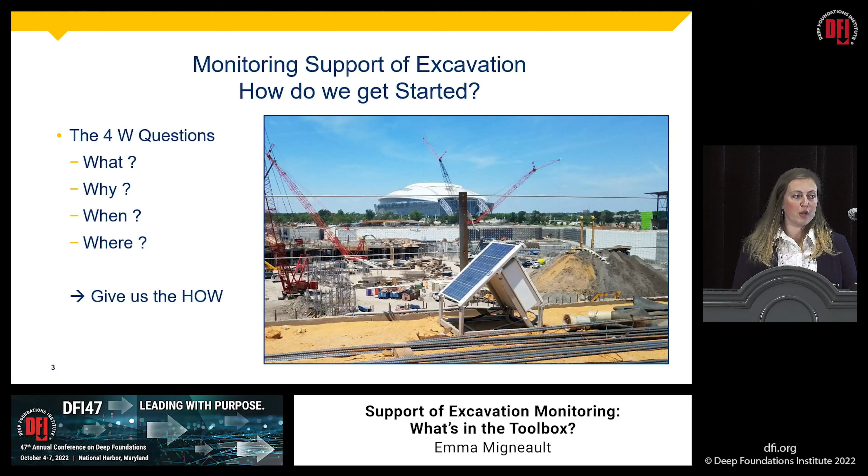So starting out with what are we monitoring? So in this instance, we're talking about support of excavation. So we might be talking about sheeting. We might be talking about soil nails. And not to forget adjacent infrastructure. A lot of this work is done in urban environments where we have to be concerned with adjacent buildings, adjacent utilities, maybe bridges, and also rail. Where I am in the Boston area for a lot of our projects, rail is a big component of the monitoring that we end up doing associated with support of excavation monitoring.

So the reasons that we monitor, sometimes we get the call and it's like, well, I have to, so can you come do this? But otherwise, sometimes it's about mitigating risk. Sometimes it's about design validation and construction control. But whatever the reason, we got to understand the project to come up with a good solution that can provide all the data values that are needed to understand what's happening on site and make objective decisions.

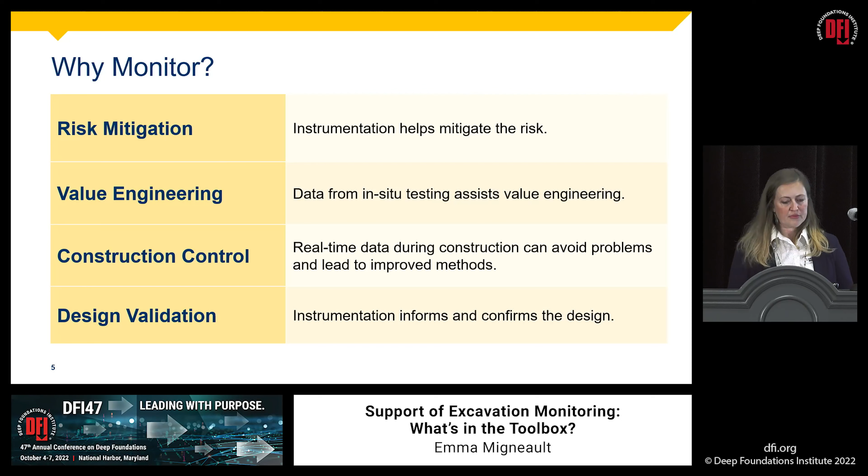So when are we monitoring? Not really just to block off on the calendar what we have to do and when we have to do it, but really to understand primarily the frequency of monitoring over a baseline period and then through the project. Frequency of monitoring can really dictate what kind of systems are able to perform in that situation and give the data that we need. So are we looking at once a week? Are we looking at a couple times a day? Or are we looking at every few minutes? It's a big factor in when we pick the systems that can make that data happen at that frequency.

It's also good to think about the duration of monitoring. If we're going through various conditions and we need to just be aware of them, whether that's increasing the maintenance schedule over winter months, especially in New England, that's pretty important. Or if it's just understanding how it might factor into solar power for the systems. Understanding the duration of the project can be pretty important to what systems we design and how those systems function on site.

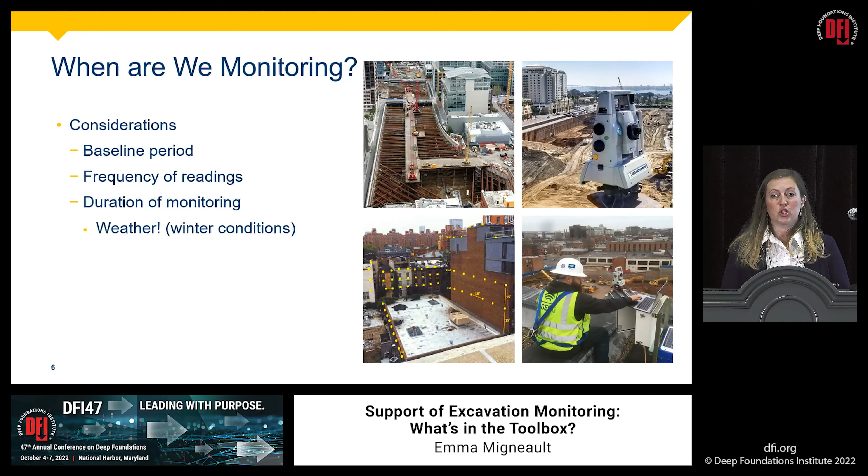So where are we monitoring? So we're monitoring the support of excavation, but are we monitoring just at the top, or do we have to come back and install more along with the progression of work? What is the access like for those locations, and how does that determine, in terms of initial installation or system maintenance through the project life? Definitely important things to consider.

We also want to think about the number of monitoring points. What spacing do we need them at, both for the support of excavation or for adjacent infrastructure, and what's going to be able to give us the best picture of what's happening on site.

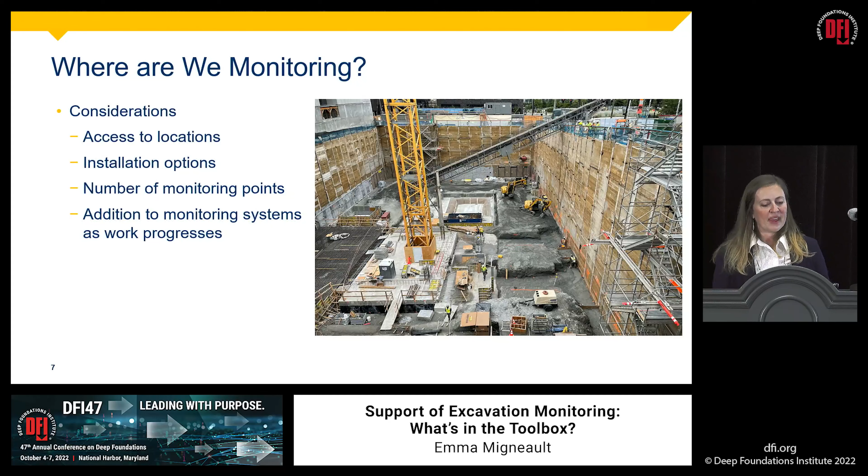So this kind of brings us to how. Having that conversation, understanding the parameters that you're looking at gives us the how, what systems we can pull from the toolbox to give the best monitoring solution possible and get that data in hands to make those decisions and to understand what's going on site.

So there's a bunch of different systems that you can use. Sorry, it's a little cut off here, but I'm going to be able to go through a couple of them, not too many more. You're always welcome to stop by our booth or give us a call to find out more, but there are a lot of options. So we'll go through a couple of them, do some pro cons, see how they fit into what we talked about earlier in terms of how they fit into that conversation of understanding the project needs.

And then the last thing I did want to talk about too is the data visualization, the data platform. So you have all this data on site, but you need that last component of the toolbox, the visualization, the platform, to be able to take that data and understand it, to bring it to all the stakeholders to make the decisions you need to make about your project.

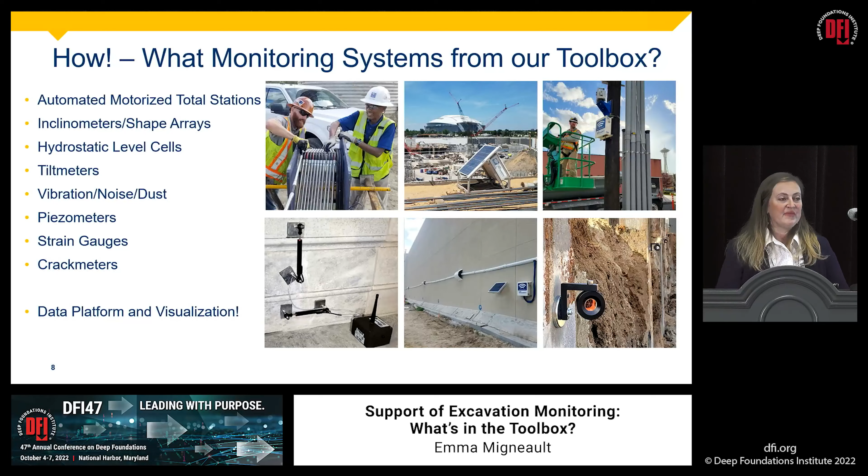So when I was thinking about these systems and going through them in a shorter time frame, I thought pro-con list is the way that I like to think about things quickly. But it felt a little unfair to give these systems a con list. It's not necessarily a con for the system, it's just less of a pro. It might be perfectly applicable to some projects, maybe just not the one you're looking at in that moment.

So my pro and less pro for this one, the automated motorized total station. This is a great system, and we put it on a lot of projects. Actually, there's one at our booth right now. It's reading cycles for prisms that aren't there, so it's futile efforts for a couple days. But one of the things that makes this system really versatile is that we have a lot of prism options or monitoring point options for the system.

So it can monitor more than just one structure. It can be monitoring the support of excavation. It can be monitoring adjacent structures. It can be monitoring rail or hardscape or utilities. So it gives us a lot of options in where we can use this system and what we can monitor with it.

The data output for this system is definitely a bonus. We're getting an XYZ reading from each one of those prism targets that's installed on site. So you can really understand the movement at that discrete point, but also as a whole, if we're talking about the side of a building. You can look at all the points there and see what the trend is between all of them.

The less pro section on AMTS is that it does require line of sight. It's an optical measuring system. So that total station on site has to be able to see all of those prism targets to be able to give you a reading. So in some projects, that might mean that you just need more than one station. So you can have one on either side of site.

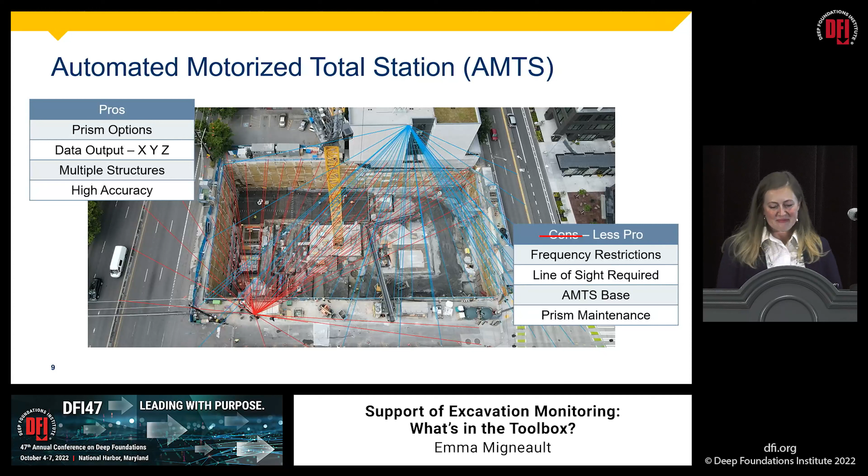So automated inclinometers or shape arrays. These are also something that we end up seeing on site a lot. This was a project down in Texas. And a pro to this is it's a great instrument that once you're putting it into casing is easy to deploy and quick to automate. So you can be putting it in the morning and getting data by the afternoon. And it's giving you that lateral deformation that you need to understand the performance of the SOE.

However, you do have to put it in the ground. So, or in this application, you're putting it in the ground. So you do have to get it either behind that SOE system or within the system itself. So that part of the installation is definitely a little bit more time consuming and involves more resources.

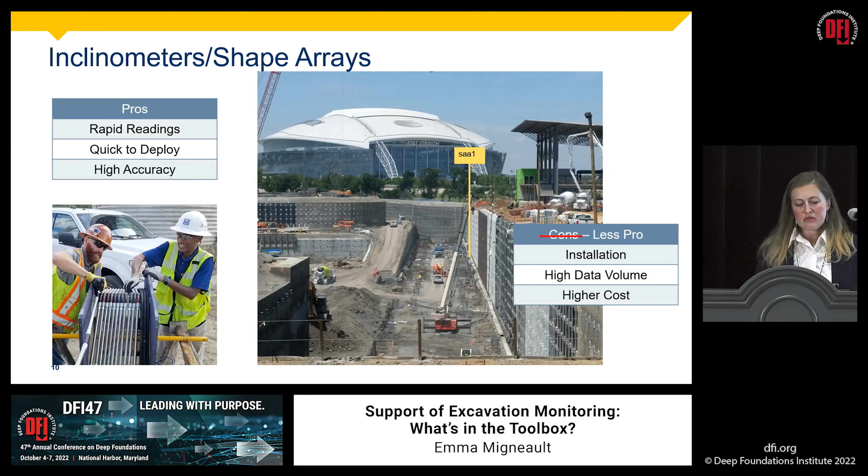And this system is great for providing high frequency data of settlement and heave that can read in the range of minutes. So it can be really applicable for techniques such as in this application, it was jet grouting, where you really need that rapid data collection to understand the performance of the activity that you're doing and the building adjacent.

The thing that makes this both a pro and a less pro here is the system itself, the installation. It's customizable in where you can put the sensor cells, but you are limited in the fact that you have these sensor cells going on this structure and they need to be connected not only by the signal cable for us to get the readings from the sensors, but also by a line of liquid and a line of air. And they have to be within a tight threshold of one another in terms of the level they're installed on. So that can be a little tricky.

It's an installation that involves multiple days and multiple people, but for the right application, it has a great data deliverable and can be really valuable.

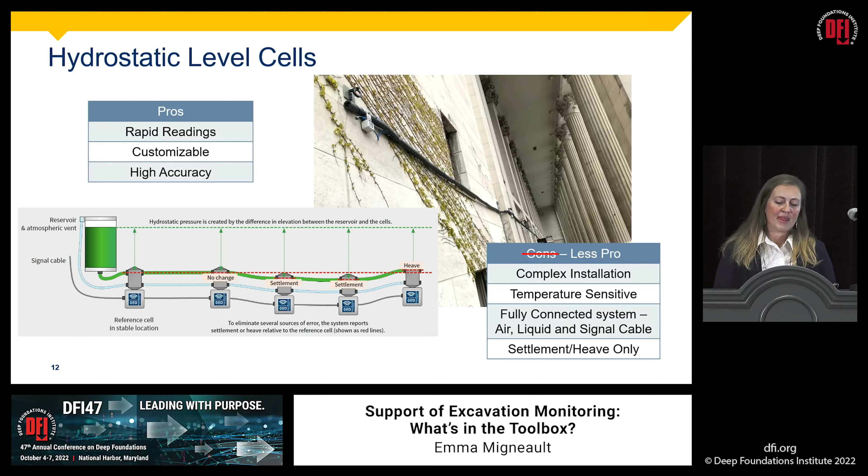So tilt meters, wireless tilt meters, wired tilt meters as well, although we haven't used a wired tilt meter in a while. These are good systems for a rapid deployment. They have quick installation, and they can have quick reading frequency as well. I have up there that 15 minutes is kind of a quick reading frequency. They can go faster than that, but there is a slight trade-off between the reading frequency and the battery life. These are battery-powered instruments, and the faster you go, the faster you deplete the battery within them. So you can go faster if you want, but you just have to keep in mind what that might mean for the power consumption.

These systems do run on a flat mesh network, which, if you're not familiar with it, is a great system of allowing multiple nodes, tilt meters included, as well as nodes that can read other systems, to communicate with a gateway on site and transmit that data. So you can operate multiple instrument systems with one flat mesh network.

But we do have to keep in mind that the flat mesh network, whether it be tilt meters or tilt meters plus, has to have an ability to transmit that data out, whether it be directly from the node to the gateway or from node to gateway, can hop around. So making sure that you have multiple avenues for the data to get to the gateway and out is important. If you have it all filtering through one node based on going around structures or site constraints, an excavator knocks that node off and you're without data for a couple days until you get that replacement up.

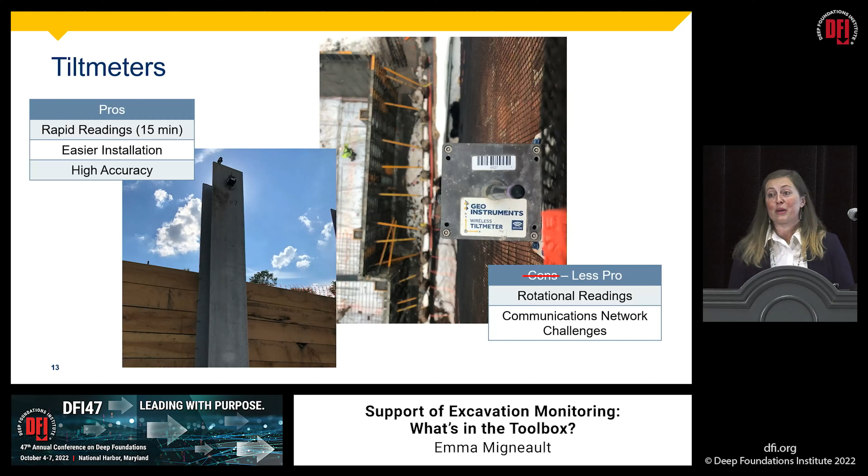Environmental systems, I've kind of lumped them together in vibration, dust, and noise. And these are something that are really just now a requirement on most projects that we see. And if not a requirement, a good idea to have. The plus for most of these systems is that there's a lot of configuration options to make sure that they suit the needs of the project.

So if you're talking about a vibration monitor, your sensor could be on the structure, on the exterior. In the interior, it could be a borehole geophone. And then you make the configuration of the communications and the power peripheral to match. So I have some of the rugged ones there on the side that were installed on a project site where there was public access, so they needed to be really pretty heavy to make sure they didn't leave site, but also pretty resilient. I think one of those was actually hit by a truck 3 times. After the 3rd time, we moved it.

And then some of the less pro section about this is that something like a dust monitor is a power-hungry instrument. So, needing these on site, you do have to accommodate for the power considerations of something like that. So you can see there is a huge solar panel and a rugged enclosure to have a very large battery backup for that system to make sure that you can get that system running and working the way you need over the period of time you have it out there.

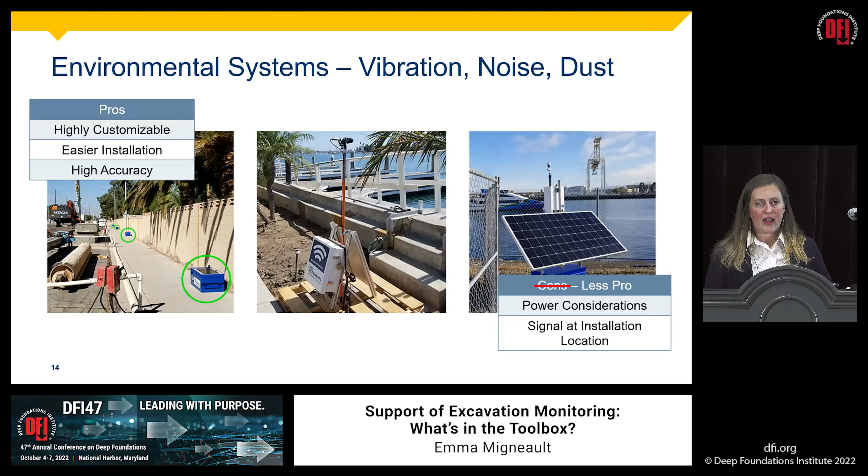And then at the end, you're pulling all of that and putting it into your data platform. Maybe one of the most important parts, you can have all the instruments on site, but you need to have them in your hand. You need to have them on your phone at this conference so you can be checking this instead of listening to this boring talk that I'm giving you, or you can be checking it from your office or while you're on site, getting that good picture of what's happening to the structure you're looking at or the support of excavation wall that you're looking at in front of you.

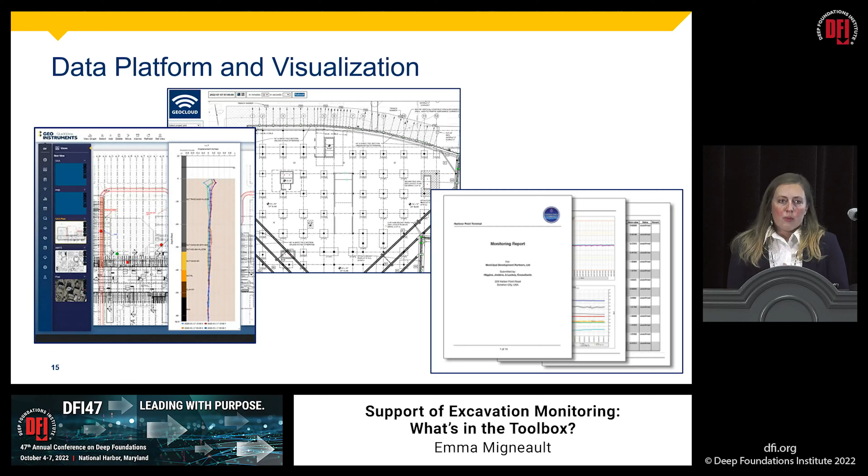So putting it all together, there's a lot of solution options out there, and it's understanding what it is you need, what questions you're answering, and then finding the solution that fits best. And from there, you have a solution that's really going to be beneficial to all the stakeholders on the project and make everyone happy. I'd say that it's like a light at the end of the tunnel when you start to when you finish designing and implementing your program. But since this was about SOE, I'll say it's the rainbow adjacent to site instead.

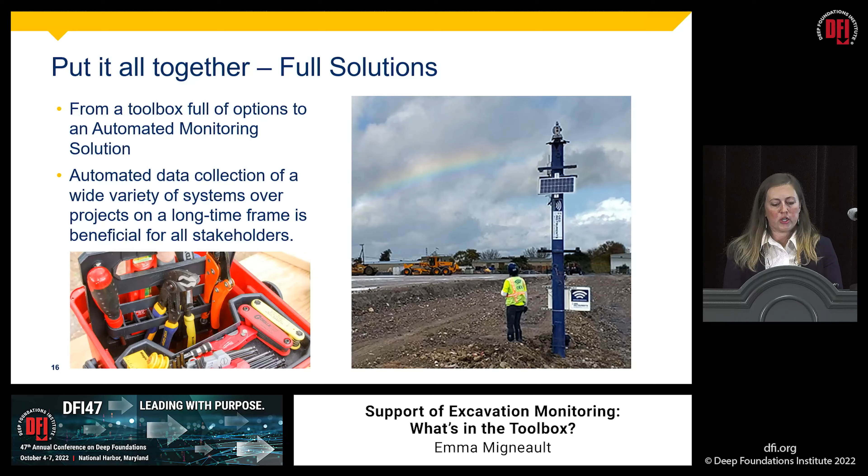Thanks very much. I think we have about 1 minute for questions, so if there's any questions anybody wants to do. Yes. Thank you. By now, you must have amassed massive amounts of movement data for support excavations. You got a lot of pictures of that. Have you ever published data like typical movements in support excavations?